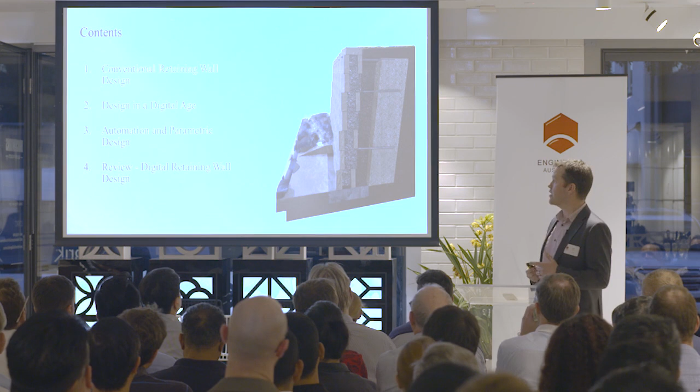So my presentation tonight's got 4 topics. The first part is conventional retaining wall design, the simple things we have to do no matter what we're doing for retaining wall design. Then having a look at the state of play in terms of a digital age and how that influences our design. And then moving into some of the things which are developing in the industry, so automation, parametric design. And at the end, a bit of a review, so a bit of a summary of my perceptions of digital design of retaining walls and what are the key things to take away.

So, conventional retaining wall design. These are things that we have to complete to make a successful retaining wall design, no matter what we're doing, no matter what software, no matter how complex we're getting, whether it's just a hand calculation. So we have to understand the design layout and objectives. What are our profiles like? Are we designing it for a road? Are we trying to control ground movements? Is it a strength case? So what are we trying to achieve with our retaining wall design?

The next is the geotechnical model. So geological model, understanding groundwater, understanding how the ground's likely to behave, and then also geohazards, which may challenge or be issues for our retaining wall design.

Thinking about the design scenarios, what are our loading cases? Is it static or seismic loading? What are our durability requirements? What's our design life? What are the things that are going to drive our design? What codes do we have to adhere to?

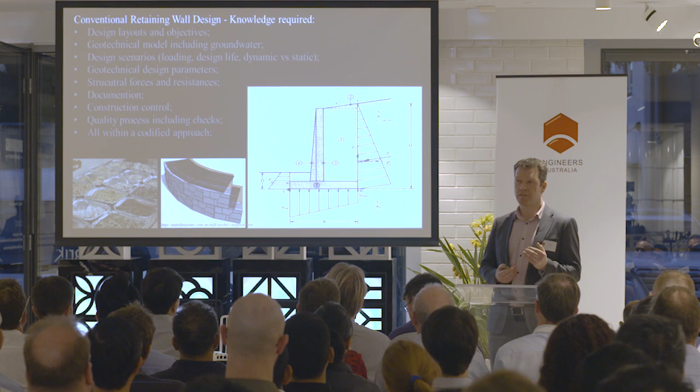And then it's the geotechnical design parameters. So what are the actual values that we're going to use to calculate our forces and our resistances for our walls?

Our retaining wall design then generally generates structural forces. Therefore we need structural resistances, so looking at the concrete, reinforcing, steel strengths, and we then have to bring that together in terms of documentation, drawings, specifications, schedules of quantities.

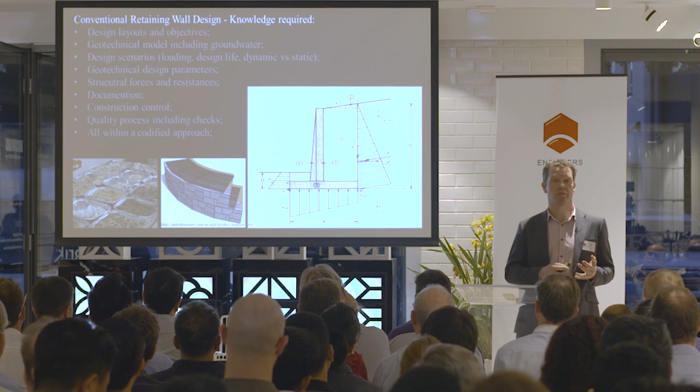The wall then will be built on site, and there needs to be a suitable level of construction control, making sure the conditions on site actually match what we've modelled, what we're anticipating, and that it's been built to the proper standards. And this needs to sit within an envelope of quality control, checking our systems, whether they're hand calculations or advanced computer programs.

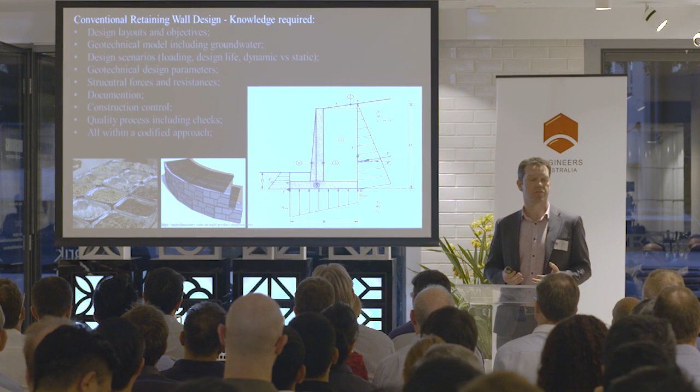And the QA of our documentation all needs to have an overlay of quality, and this all then needs to sit in an envelope of a codified approach, so in accordance with standards and guidelines. So no matter what we do, no matter how fancy we get, we have to achieve all these things with our retaining wall design.

So the second part, retaining wall design in a digital age. The first part is the good old rubbish in, rubbish out. Again, no matter how complex we get with these systems, if we don't get our fundamentals right, those things I've talked about on that previous slide, then we're not going to get the right answers of our retaining wall design.

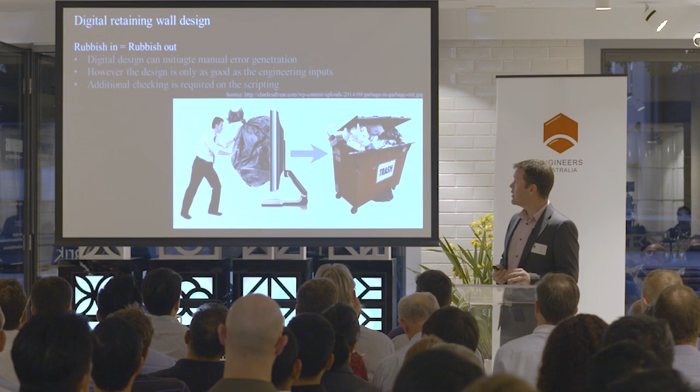And as we get more and more complex with our design approaches, there's a higher risk that we will miss the key parameters or the key inputs. So the other part of it is whenever we're doing additional scripting or programming as part of it, there's also additional design checks we have to have on those pieces of automation or scripting which we're incorporating into our designs.

So digital design inputs. What's currently coming into our design? The recent AGS journal's got a fantastic episode on digital design and inputs of laser scanning, LiDARs, drone surveys. And these are all new inputs which have significantly changed how we design retaining walls.

So at the top there's some laser scanning. That was a research project from a girl at RMIT University. So the universities are incorporating this type of thing as part of their projects. So it's coming up through the graduates.

Site-based tablets for data collection or hazard mapping. We then go into photogrammetry processes, so you can create 3D maps or 3D images with your smartphone. If you take a series of photos, you can then paste them together to get 3D models.

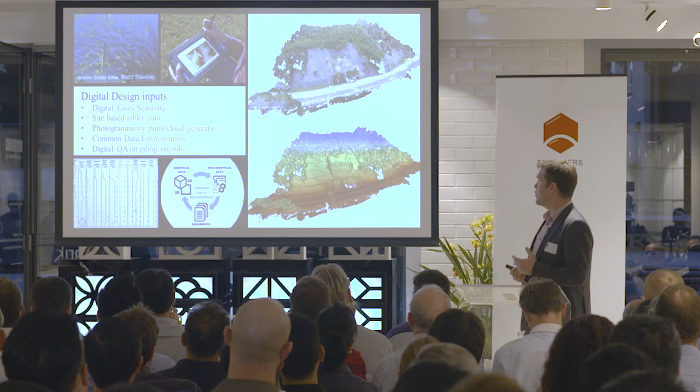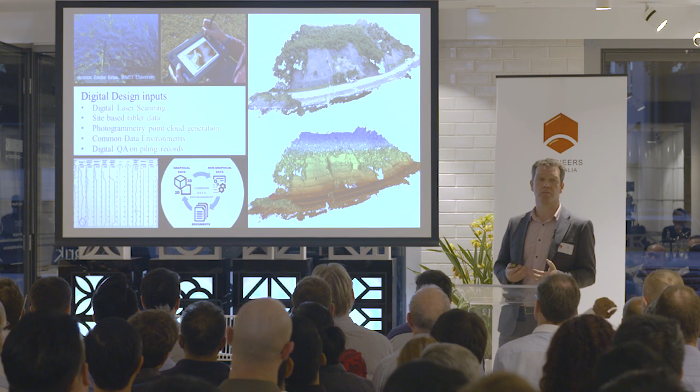We then work in much more complex data environments, so common data environments - graphical data, non-graphical data, our site investigations, and then all documentation that goes with it. So there's a whole new layer of information which we have to process and bring into our designs.

And then there's also a construction control aspect as well. So for instance, that's a log sheet in the bottom corner there from a deep soil mixing rig, which is telling you about the grout processes and the torque speeds. So this information is then available, which we can then start to include into our digital assessment of construction control and quality of construction control.

And then there's our design approaches. So there's various levels of sophistication. I should have actually had a paper and pencil up here because that's also an equally valid design approach we could use. So these things range from a piece of paper and pencil.

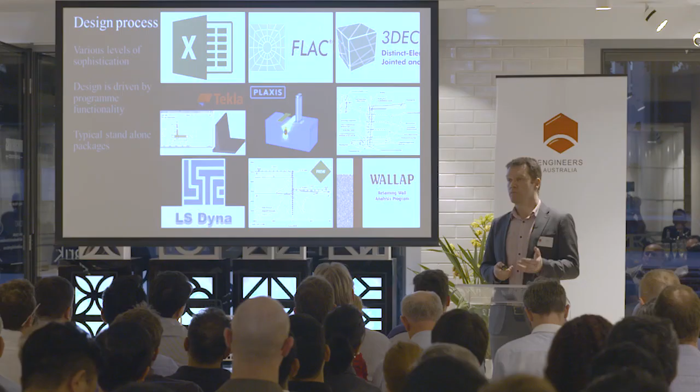On the middle right there, there's a typical retaining wall detail. So there's tables, and Austral's got examples of these, where for a given retained height and given soil conditions, it tells you how many blocks you need or how far your straps need to come back. You then start to move into spreadsheets, which have got added complexities or calculations, but also you've got the risk of someone else making changes to your spreadsheet and not detecting them.

We then move through software packages. So Plaxis in the middle there is a very common piece of software. FLAC, 3DEC, which is an absolute monster of a program that you really need to be very specialist to be able to use. And so there's a whole range. And as we choose which design method we're going to be using, we're also confined to that design method. We also take on all the assumptions that are inherent in those programs, be they good or bad, and the complexities in them.

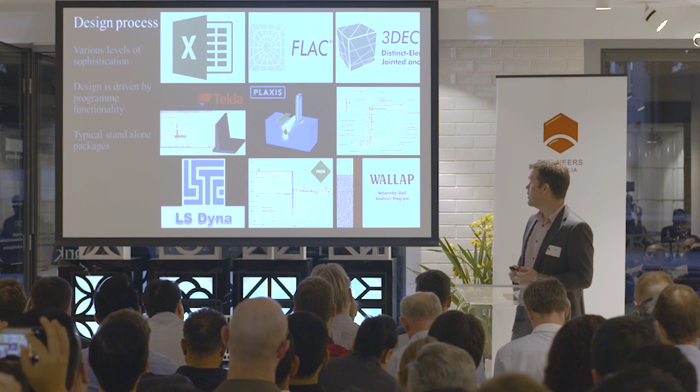These often are also standalone packages. So, right, we need to design a wall, someone goes and does the wall design, and they then produce some output from that. It's not necessarily integrated into the whole design process, so they tend to be slightly standalone.

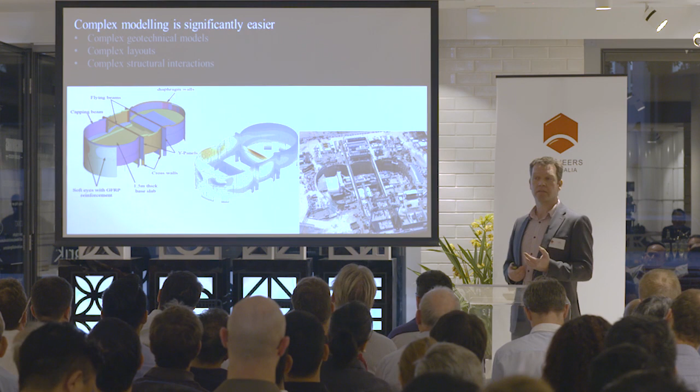Nowadays we can do a lot more complex modelling than we could 5 or 10 years ago - complex geotechnical models in terms of soil hardening models, creeping models. We can model much more complex layouts, and we can look at the forces we're getting through in a lot more detail and identify what our pinch points are. This modelling is becoming more and more commonplace, whereas 5 or 10 years ago it was really quite unique. So our modelling ability has significantly increased.

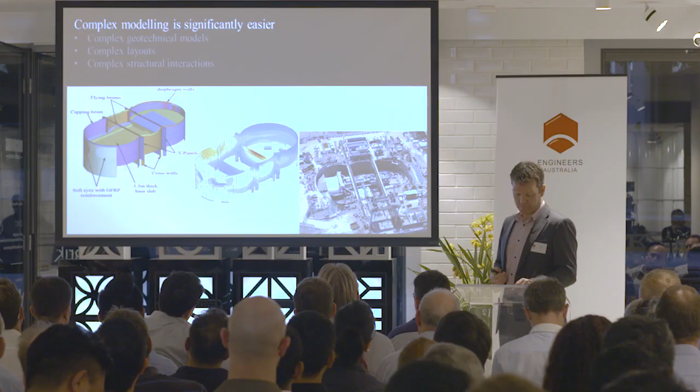So a bit of a case study then, looking at more complex design methods. This case study is debris flows and retention. Typically, if you're looking at a debris flow, it might be impacting on an urban area, and therefore you may put in some type of retaining solution to mitigate those risks.

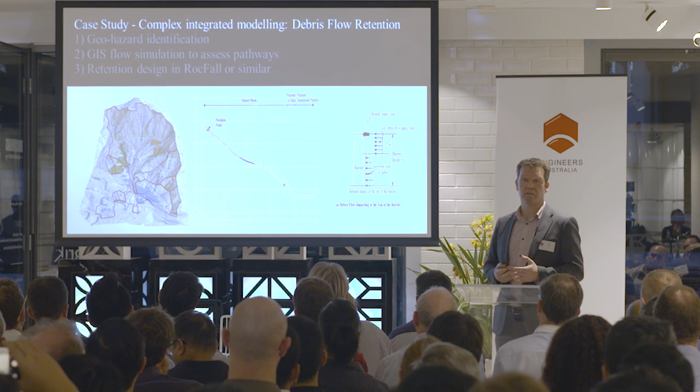So a typical approach might be you identify the hazard from a site walkover, and you have to do that to work out what your risks are. You then might do a GIS flow simulation, modelling that flow path moving downhill, and then some type of retention design, a RocFall analysis, or some type of pressure assessment on the side of a wall. There's a few different ways you can do this.

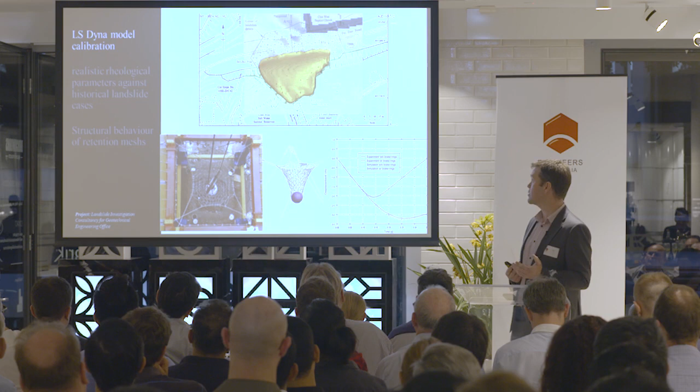But technology is moving to a degree now that we can incorporate more complex dynamic models. In this case, what they've done is taken historic landslides and modelled the actual debris flows to try and get accurate parameters for the soil mass as it fails down. They've then taken structural models - this is in the same piece of software, LS Dyna.

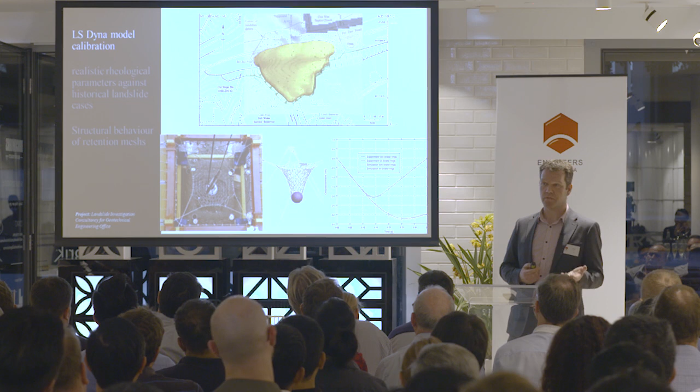They've taken some structural models, actually replicated meshes with controlled tests, and calibrated the results from tests with the actual models to make sure they're modelling the structural behaviour correctly. You then start to combine the two of these together, so you can combine the debris flow with the actual behaviour of the mesh, and of course they then calibrate that against test examples.

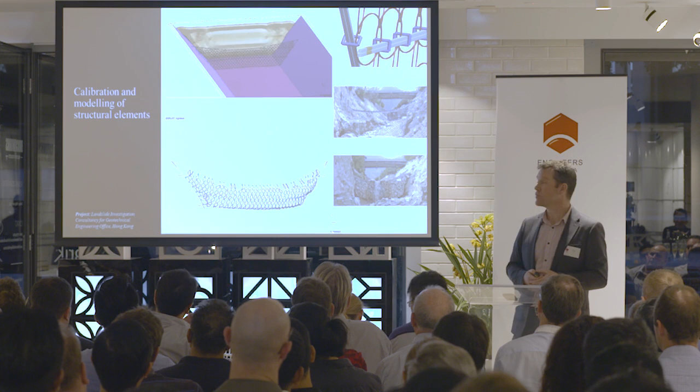And you can then start to model this in real life. So you're now looking at 3D models which you've captured from LiDAR or other methods. You can then model your complex debris soil models, and then look at the forces on the retaining walls and structures. So you're not just relying on some empirical relationship on the impact loading, you're actually doing a proper assessment on what the forces are. And this doesn't have to be landslides.

This could be vehicle impact loading. This could be a ship berthing loading. So there's a whole range of significantly more complex tools which are available now in terms of modelling more dynamic behaviours.

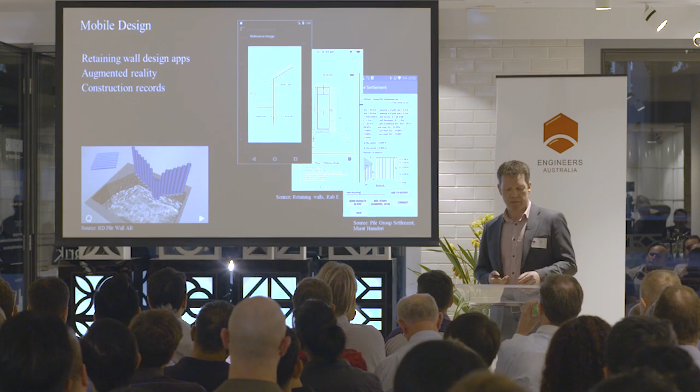We're also in a much more mobile status these days. Each of you in your pocket has got a little mini computer in your phone, and you can get apps which can design your retaining wall. So you're on site and you need to change a pile spacing because the ground conditions aren't right - you can just go through and run it on your phone, that might be a reinforcing calculation. So there's a lot more computing power available to us on site, and data collection is another example.

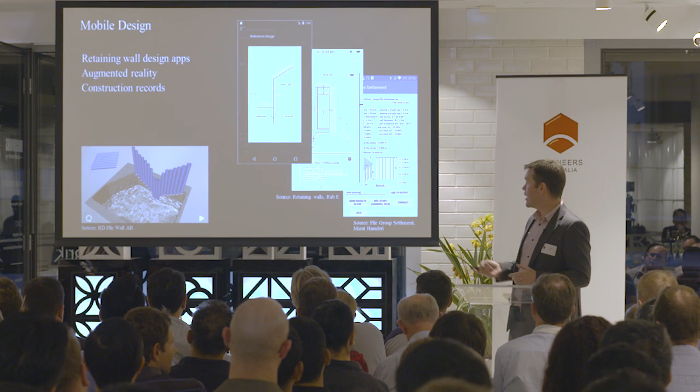You're then moving into situations of augmented reality, like on the bottom left there. So you may have a retaining wall design, in this case a pile design, and you can actually be out on site holding up your phone or your tablet, and you can actually see how it looks. I know they're talking to Michael here tonight - Austral's looking at that type of technology as well. So it's emerging more and more in the industry as this augmented reality type of assessment and understanding for retaining walls throughout the industry.

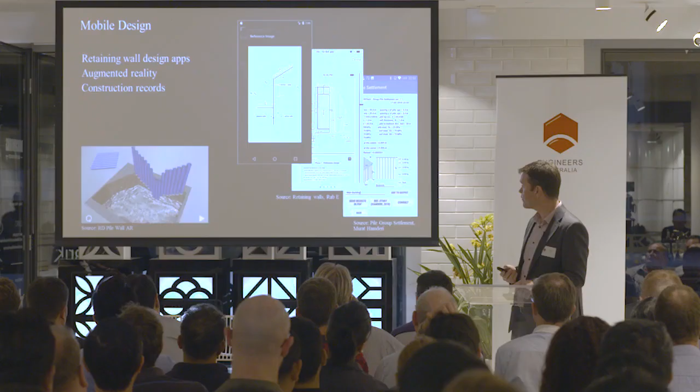Could I just get that video going? So this is a piece of programming work done by DeepMind, which is a branch of Google. And if we get this playing.

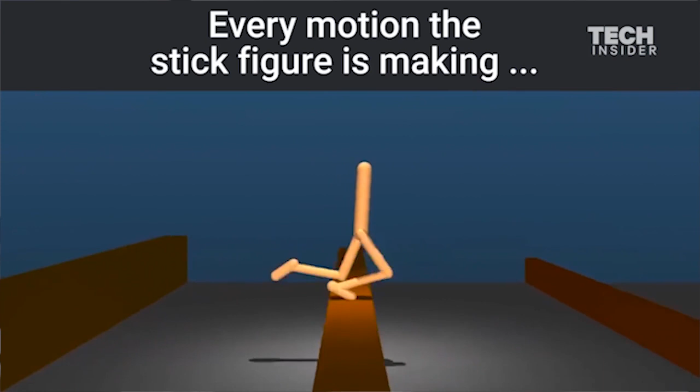So in summary, this is a piece of programming where they compiled a bit of script to enable an object to move, and gave it some ability to visualize and see objects. They then basically told it to move from A to B. That was it. The program had some constraints on relationships, and it started to implement those relationships, slowly starting to move itself forward.

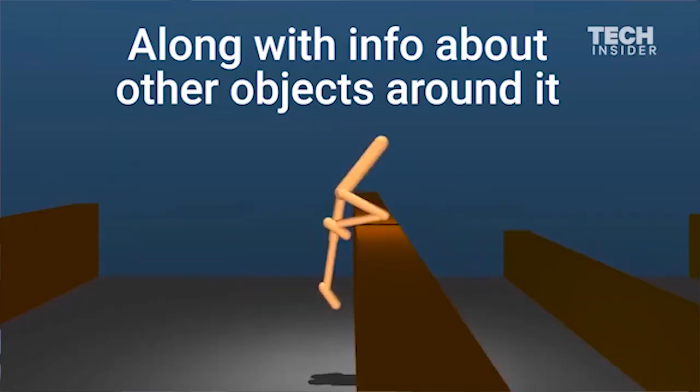It found new and better ways of moving. It could then start to detect its environment and understand how it should be approaching different scenarios, and it turns out that that's the most effective way to run.

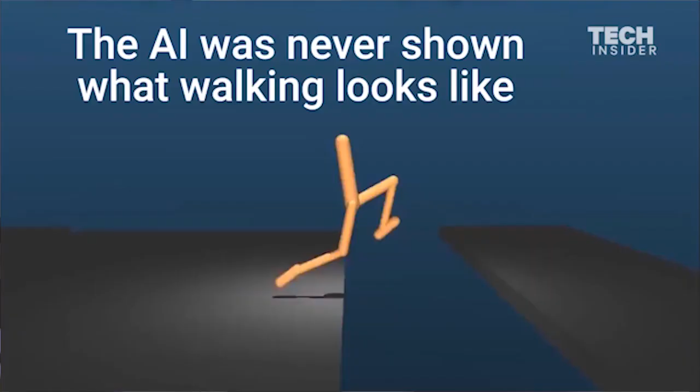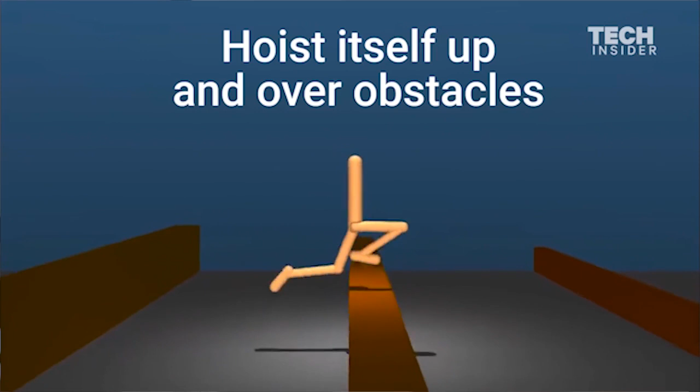So if we can incorporate pieces of script on behaviours and procedures, the machines can then take that to a level which we can't, which we could never model ourselves. So machine learning is the ability of a machine to take pieces of information and continuously improve that, making it more and more efficient to do it better than we ever could.

Yeah, exactly. I love this, it's funny. But what does this mean for us?

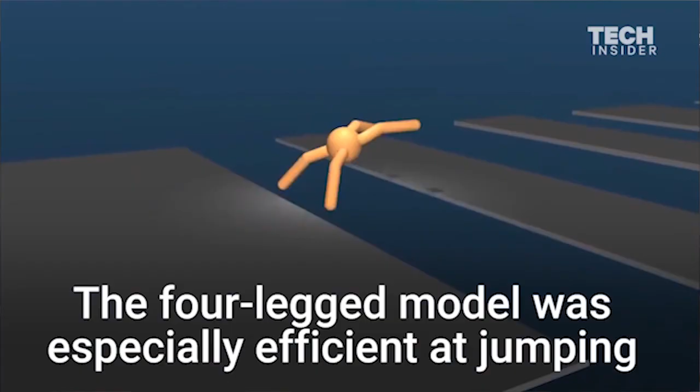So I had an example before where I showed a soil mixing log from a deep soil mixing machine. For machine learning, it could take the individual pieces of that data sheet and interpret what the behaviours are and develop relationships. It might take a whole range of CPT logs and from the tip resistance, the friction resistance and the pore water pressure, determine what the geology is.

It might then relate what one borehole is saying to another borehole. So it might then take those individual CPT logs and assess what a ground profile is.

You might then give it some information on what a valley formation looks like or what a hydrological formation looks like. It would then take those individual pieces of CPT logs and overlay potential hydrological features to actually create valleys - so not just interpolating between points, but using other algorithms to create more complex profiles.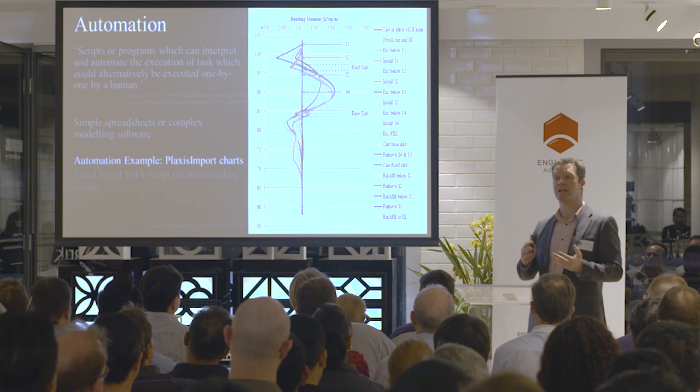So machine learning, it's a big topic, it's a big area, and I just think of a funny running man. That's my base case whenever I think about machine learning. It's self-programming.

But automation - there's quite a few definitions of automation. The one I like is: scripts or programs which can interpret and automate the execution of tasks which could alternatively be executed by a human. This can be applied to simple spreadsheets or very complex modelling software.

So you might have a spreadsheet and a macro which copies a cell from one place to another - that's a very simple form of automation, or something which looks up cells when you paste it in. There's lots of options and ways in which you can include this in your work.

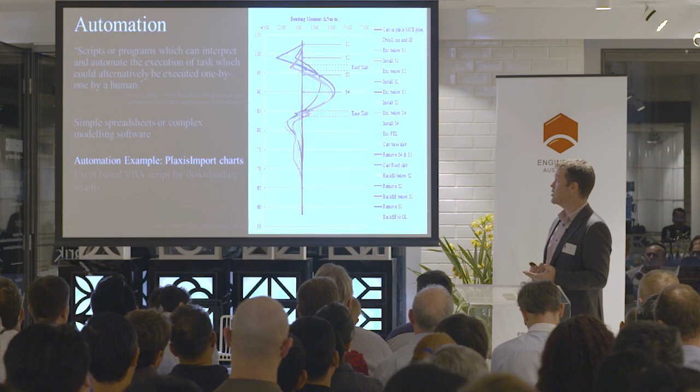This example was built by a colleague of mine, Andrew Coy, and it's an Excel-based script that gets results from Plaxis. If you've ever worked with Plaxis a lot, you'll know that actually downloading every single modelling stage and cutting and pasting it into a spreadsheet is an absolute nightmare - it's a huge amount of work and very time-consuming.

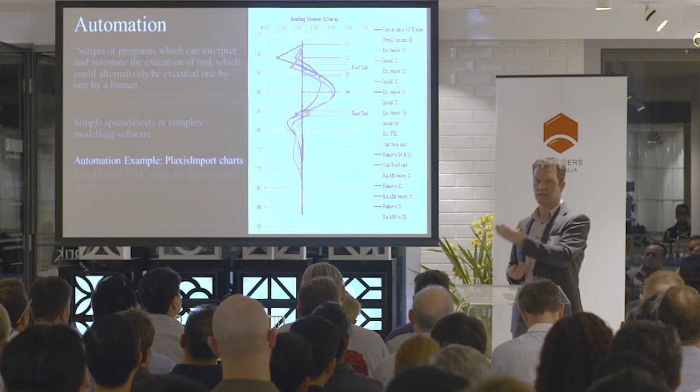So he's written a script which automatically downloads it from Plaxis into a spreadsheet, into a nice, consistent format. The benefit to this is it reduces manual tasks - scripting can reduce the time you're spending on your design, on your more tedious works, and it gets you a more engaged team.

People don't like sitting there all day cutting and pasting data. It reduces your errors - you've got a consistent manner of importing the data, and you've also got improved documentation. If you set up your templates well, then you can reuse them again and again.

Improved productivity and faster delivery, and that's a win for everyone - it's a win for designers, a win for contractors, a win for clients. The faster and better we can do these things, everyone's going to be a winner.

Parametric design - again, parametric design's got a few different definitions. The one I've gone for is where model attributes are interlinked automatically, so when one attribute is changed, the other parameters are adjusted automatically. You change one thing and another thing changes.

This is more and more common in the industry in terms of bridge structures, where they'll change piles, abutment spacings and the size of the decks. But it's also used in, or can be used in, retaining wall designs.

It's been around a long time - Antonio Gaudi, from Barcelona fame, used it as well. To construct his complex models, or his complex buildings, he'd actually hang them upside down, get bits of string and attach lead weights to them. The natural shape of which those pieces of string fell was actually the direction of the forces.

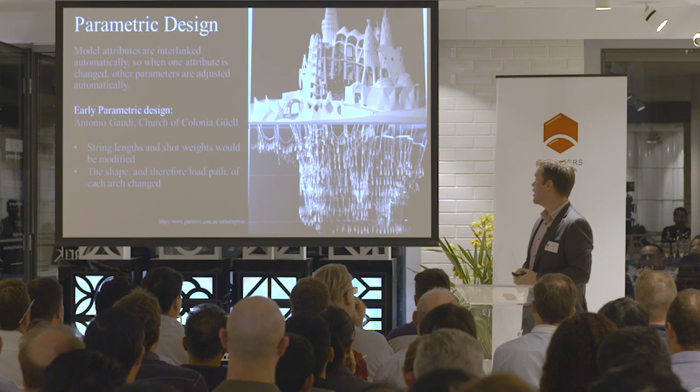What he'd do is change the length of a piece of string, or change the weight of one of the shots, and that would change not just one string, but would then reflect through the model and change the profile and shape of other strings. So he was changing one parameter and it was filtering through the model, changing other parameters. And of course, he'd take the whole thing, flip it upside down, and that's how he came up with his fantastic architecture.

In terms of parametric design, this is an example from the Western Program Alliance in Melbourne. This is Excel-driven visualizations, used in a concept planning stage for bridge abutments for a grade separation.

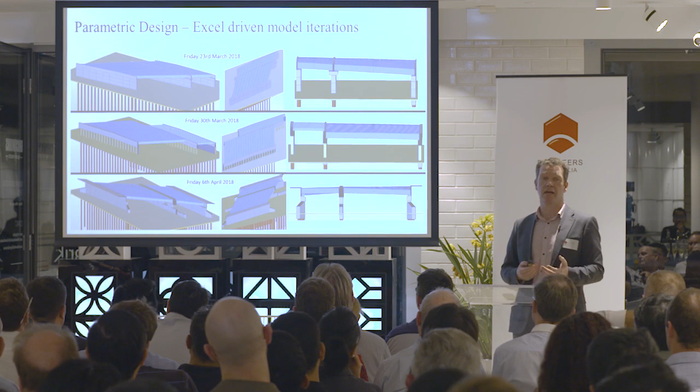These images are taken a week apart. You can see differences in the deck layouts and the type of wall heights, and this is all driven by Excel. So you could be giving someone Excel information or data, they incorporate that into the model, and straight away you've got a visualization which is interrelating it. It's a very powerful type of tool for sensitivities in your modelling.

But it's been around for a while. This case study is the Nunawading grade separation, worked on with John Holland, and this was 10 years ago. Again, this was Excel-based information brought into drawing production, enabling flexible design. The grade separation was 720 metres long with 16 different pile types.

But as they did the job, they were still drilling boreholes. We didn't know what the ground conditions were doing. So we could have standard designs, understand what the borehole condition was, and say, right, you want a type B retaining wall, or we want to change the horizontal spacing of the walls. We'd change the horizontal spacing in one area, and that would automatically change the pile depth or the shotcrete thickness, occurring within the model from Excel-driven information.

This meant we could have relatively accurate designs in terms of our typical sections, but it could then be easily incorporated into our models, and our drawings then became relatively automated. We'd change a pile spacing, the pile length might automatically change within the model. We'd then push print, and out it would come with the changed pile length.

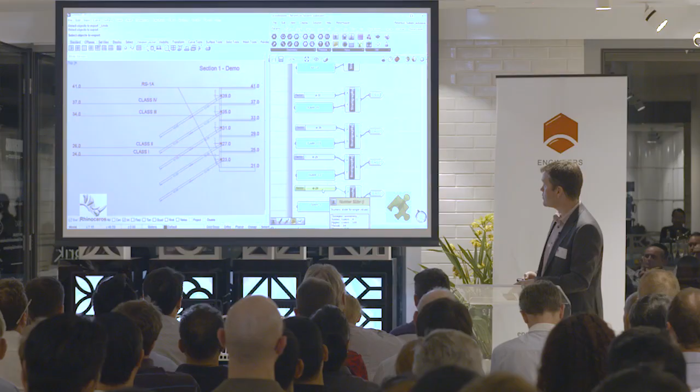Another example of parametric design - this was some work done by Rebecca in the Arup office in Sydney. This uses two programs, Rhinoceros and Grasshopper. Rhinoceros is the visualization on the left, and Grasshopper enables you to change parameters, and you can do this with Revit and Dynamo if you're from a more structural background.

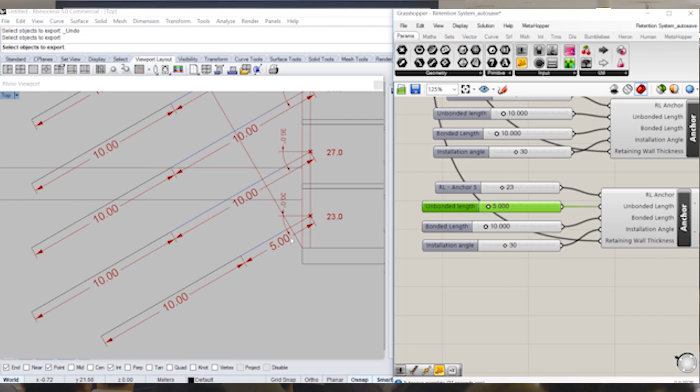What we can do here is change simple parameters on the anchors, for instance the unbonded length, and that will automatically change in the visualization. You can easily control parameters for your documentation, and you can just push print on that page, and you then have a real life change in your retaining wall design.

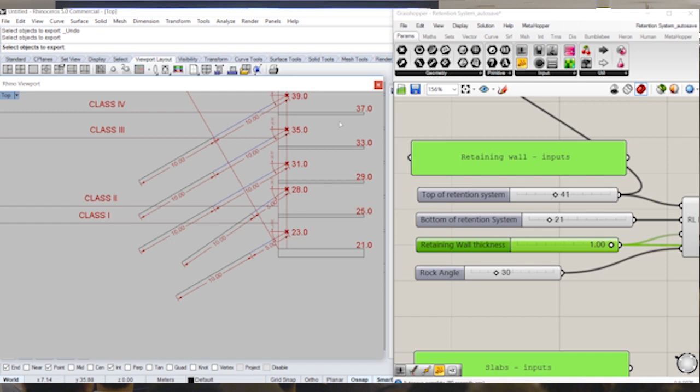This gives a lot of variability in terms of doing sensitivities to designs, and a bit more complex, putting curves into it. So we can simply change a profile, but we can also connect it to an internet or website where we can start to share it - in this case, through a website called Flux.

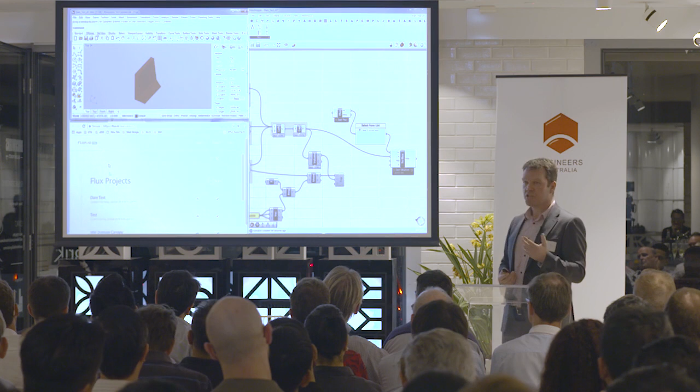This video is slightly historic - Flux no longer exists, but there are other websites such as Speckle which you can use for hosting. You can share a portal with another person in your company, another office, another company, or somewhere else around the world. They can log on to the system and see the model. You can be changing the model, and they will see it automatically change as well. This presents a whole new level of information sharing compared to typical retaining wall designs.

Once you've shared that information, it's then possible to export it into other programs. So in this case, we're going from Grasshopper into Tekla, which enables a bit more structural modelling, so you can assign concrete parameters to it. You can take the shared piece of information and incorporate it into other software. So it's potentially a whole different workflow.

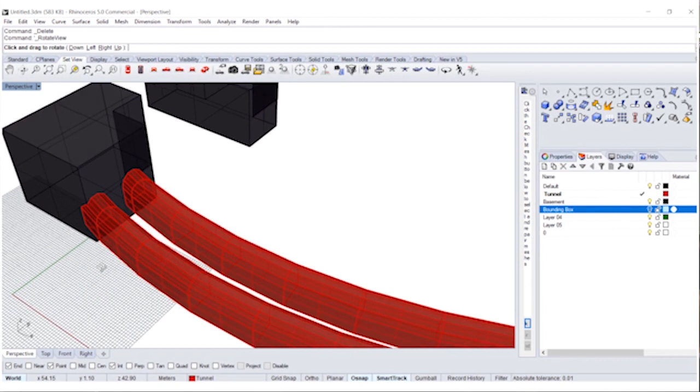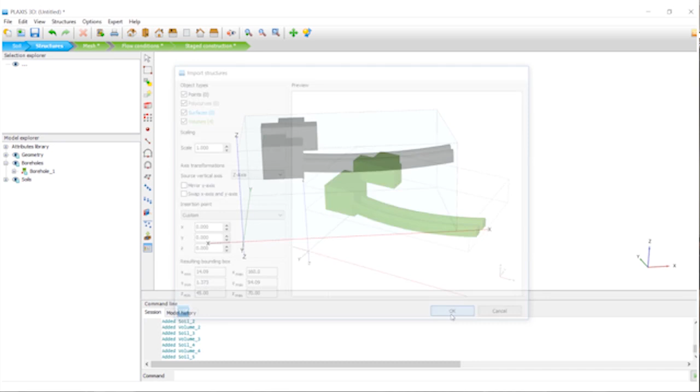Another case study doing a similar thing is creating, or in this case modelling, some tunnels, again using Grasshopper and Rhino, so this could be modified parametrically. Creating the forms, saving them off, and then we export them into Plaxis 3D. So those shapes can be incorporated in, you can mesh that up, and start to model it. You can parametrically change things, and bring them into more and more complex shapes.

And of course, that model could have been shared across offices. One of the key things with this is you then need to make sure you're getting your mesh and your techniques right for actually modelling it. And this is where you're partially constrained by your software, but I'll talk about that again in a bit. So there's whole new options there in terms of workflows in the digital age.

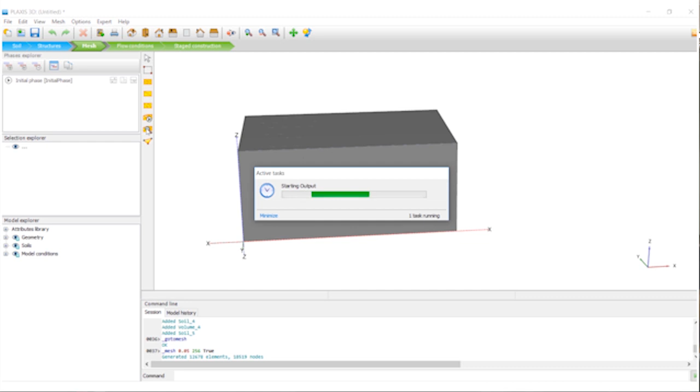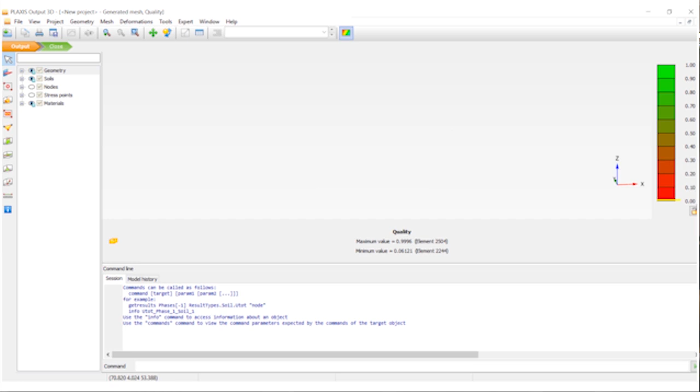So the final part of my presentation is basically a review on where we're at. And I wouldn't be a geotechnical engineer if I didn't have a quote from Karl Terzaghi in my presentation. I found this one - it's actually on lab testing, but I found it equally, or perfectly, applicable to digital design. So results depend not on the perfection of the equipment, but on the truth of the proposition.

So it's about getting, no matter what we're doing, our fundamentals right. What's the purpose of our design? Why are we designing it? And making sure that our inputs are correct.

The simpler and cheaper the apparatus, the better it expresses the purpose. And accordingly, one can gain insight into a process being investigated, approving or rejecting, and postulating anew without wasting time and money. So if you're using a simple piece of software or a simple design process, it's much easier to understand changes and be clear about what those changes are.

If you're using something like that Plaxis 3D model and I try to change something, I might suddenly start to get meshing problems, which is just an inherent thing that can happen in 3D Plaxis models. So then I'm having to change my mesh. And so the complexity of the model is driving me down different paths, and I can't actually see the simplicity of it. Or I might be changing some geotechnical parameters, but because of the complex behaviours, it's not quite so clear what's going on.

So costly sensitive instruments belong to a situation where one already has a clear hold of the natural phenomenon and where there is value in obtaining refined numbers. So just because you can do these fantastic complex models doesn't necessarily mean you're going to get value out of it. Simpler design methodologies may be just as effective.

When one begins experiments with costly apparatus, he or she becomes a slave to the apparatus and the experiment. Rather than serving to establish the truthfulness of a valuable idea, it serves merely to establish a fact, but never to establish a law. So every process we take on, every more complex piece of software, has its own assumptions built into it. So whatever we use, we're taking those on, and the more complex it gets, the more complex our assumptions become.

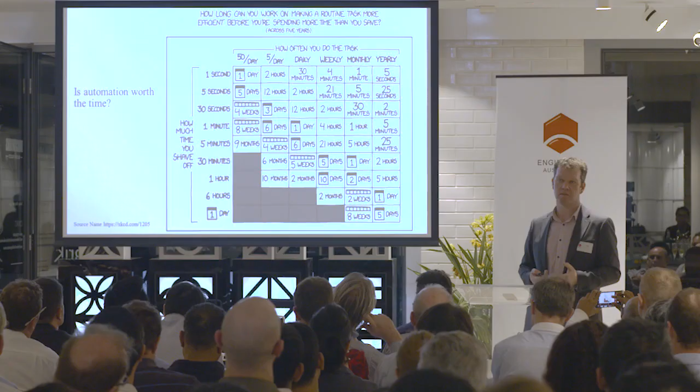This is something that's struck me in the industry recently. I noticed that in April 2018, Bentley purchased Plaxis and Soil Vision. Bentley already has a very strong suite of software - GINT for receiving geotechnical data, Open Roads for modelling geometries, MicroStation for drawing and documentation, all sitting within a ProjectWise environment, plus lots of other software packages.

Soil Vision is a Canadian-based company very good at modelling subsurface profiles and creating hydrological models. Combined with Plaxis, you start to get a start-to-finish geotechnical design flow. You can be out on site, record data in GINT, create relatively complex models using Soil Vision, consider your geometries and drivers for your retaining wall, and incorporate those into Plaxis models - maybe 2D sections or 3D models. You then have those in an environment more compatible with drawing and documentation, all sitting within a common data format of ProjectWise, where you can control versioning and automatically update models.

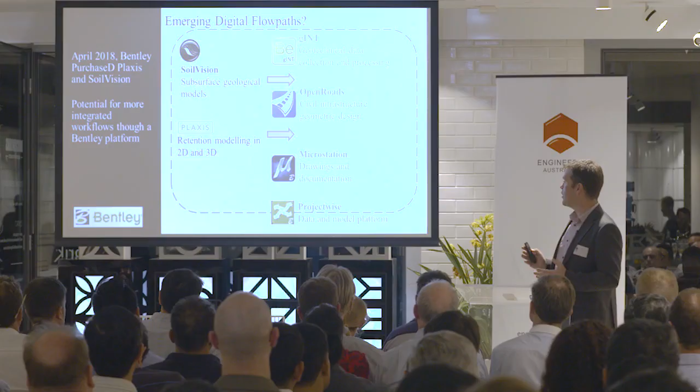I thought that was a very interesting change. I had a chat with Erwin Beernink from Plaxis, and they're working on trying to get this workflow integrated. It's going to take a lot of work and effort to get that compatibility, but my perception is that more and more, this is where the industry is going - trying to have integrated solutions and utilising the efficiencies that brings.

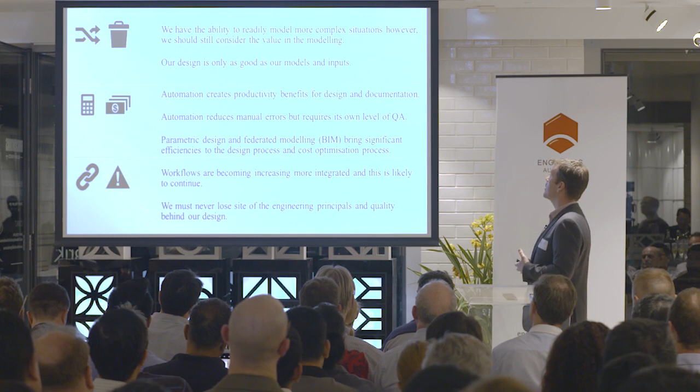So in summary, we have the ability to readily model more complex situations. However, we should consider the value in doing so - are we really getting good value with these complex 3D models, or can we use simpler approaches? Our design is only as good as our models and inputs. If we've underestimated our geological model, got it wrong, or our geotechnical parameters are wrong, or we're not designing for the right inputs, then our results similarly won't be right.

Automation can create productivity benefits for design and documentation. It also reduces the potential for manual errors, but you then need to bring in another level of QA control to make sure that your automation and scripts are actually doing what you expect, that they're behaving properly. Parametric design and federated BIM modelling, which Melanie will talk about, can bring significant efficiencies to design process and cost optimisation.

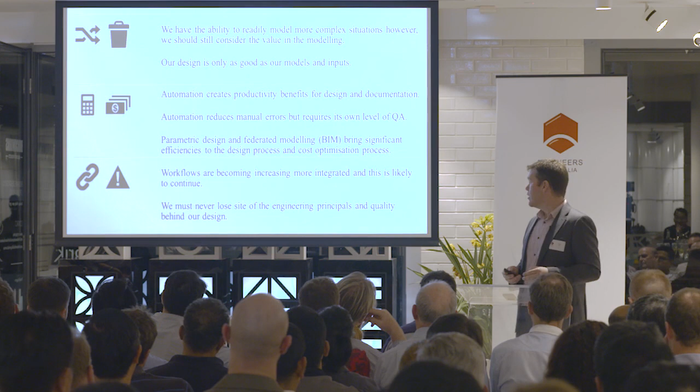Finally, our workflows are becoming increasingly more integrated, and I think this is likely to continue. But we must never lose sight of the engineering principles and quality behind our design - that's the key part. You can't beat a bit of experience looking at things and asking, does this look right? And the practical experience of understanding how these retaining walls work, whether they're simple or complex. Thank you very much.

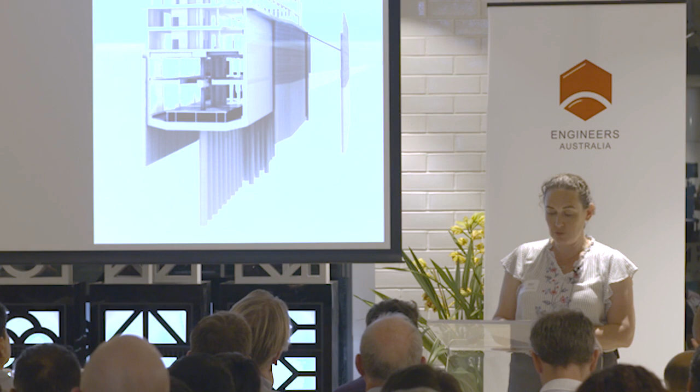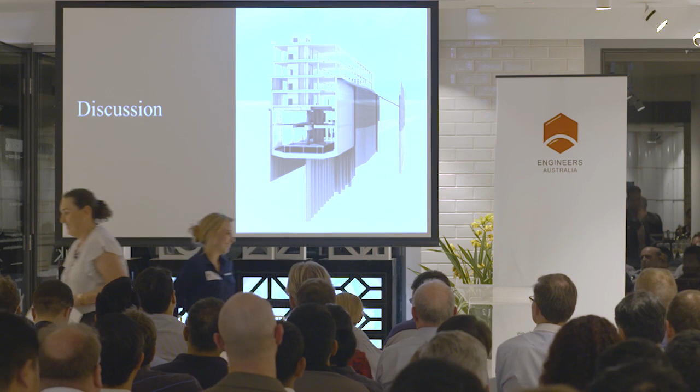As Catherine mentioned, I'm not an engineer, so please don't hold that against me. I started off doing architecture, but very quickly jumped to the dark side, and have been in construction for the last 5 years, where I feel much more at home, and I do all the geeky things. I'm really glad Chris is so knowledgeable about retaining walls and how to design them, because I don't know much. I've learnt a lot in the last week about it, but hopefully I can give you some insight into what happens with the technology and the data available on the big projects where BIM's mandated or available, and some of the benefits you can see down the line.

So I'm going to give you a quick overview of what I think BIM is, and then touch on a few of the projects in Perth that Multiplex have worked on, and the ones that have had BIM involved. I'll talk about the current technology from where I sit, and some of the potential benefits I can see in the next 5 years or so coming from these technologies and the information available to us.

For me, BIM, while some people think of it as a 3D model, I see it more as a series of geometry with data associated with it, and the data is actually the important bit. You'll have Excel schedules you can pull out of it, CSV data that allows you to transfer information between models and software. You've now got cloud spreadsheets that we're starting to link the data in these models to, and my favourite, the API connections between software in the background.

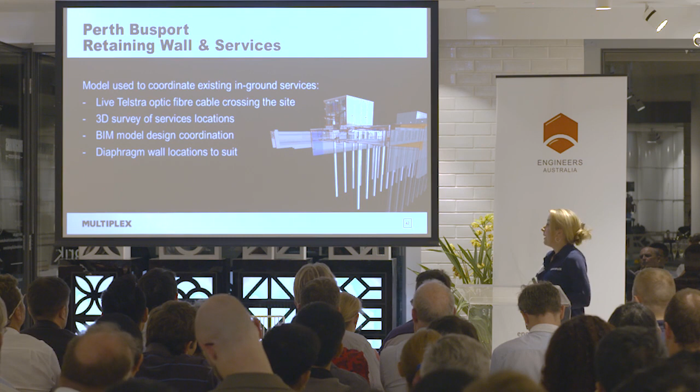And they were building diaphragm walls straight past this. So being able to not only design the wall locations through the consultancy period, but also hand that over to the subcontractor and make sure the survey points were bang on, was much easier when they could actually coordinate it using the model. So that was one of their highlights, I guess.

Moving on to the stadium, which was 3.5 years of my life, and Multiplex's first full-blown BIM project. It was state mandated, which gave us a big stick to make sure quality went in and we could actually use it throughout construction, knowing the design quality and QA was actually in the model. Some quick facts: State Government of WA, 2,500 precast concrete piles, and then 7,800 CMCs in the surrounding area to try and improve the ground. It was built on an old rubbish tip, so you can imagine what that's like, and then it's in a wetland area, so the ground stability just wasn't there.

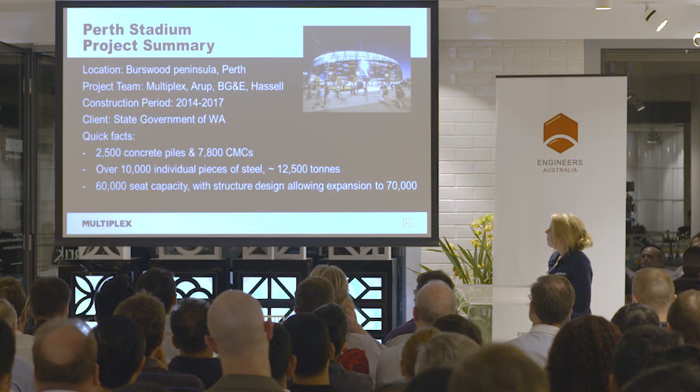The stadium itself will be a 60,000 seat capacity, and the structure has been designed with the provision to add an extra 10,000 if Perth keeps growing the way it is. And the steel structure was phenomenal, so I've got a couple of slides later on to show you about that.

On the BIM front, the federated model was made up of all these other individual models built by different companies. In total there were about 105 individual models that went into this federated model, done by 36 companies, 24 of which got handed over to subcontractors. The compressed export file was 2.5 gigabytes. The Revit and Tekla models added up to about 200 gigabytes in their native formats, but every week we'd spit out a 2.5 gigabyte Navisworks file.

The model itself got used by a variety of different people. We had the client, who actually co-engaged PDC, our BIM consultants, to upskill and do training so they could use the model. They were made up of 4 different arms: the sports guys, strategic project, local government, and Venues West, all as one big team.

Then you had the operator of the stadium that came on about 2 years into the project. And the contractors - we didn't use it as much as I would have liked, but we're getting there and upskilling people as we go. Consultants generally have a really good understanding already of Revit and Navisworks and that kind of thing.

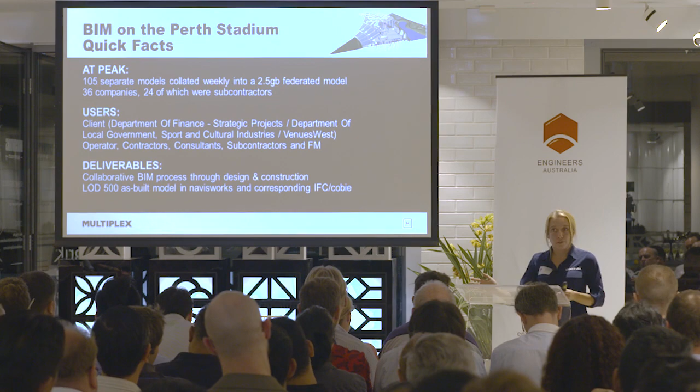The deliverables weren't just the LOD as-built model - we actually had commitments to make sure during the design and construction process we were encouraging BIM collaboration and making sure people were trained and getting the most out of these models.

Some of the software we used was the Autodesk suite - 80% of the consultants used Revit. The main exceptions were structural guys who used Tekla. Dynamo is a great little API that plugs into Revit, and we did some pretty fancy stuff with that. Jira was used for issue tracking, brief compliance, and some of our design changes that came through. Tekla, obviously, was used by the structural guys, who made some phenomenal models. Aconex was our document control and correspondence system, and dRofus was our room data sheet, schedule of accommodation.

So that just gives you a taste of the software that was used and the information carried across all of those, and we tried where possible to get them connected.

One of the big wins was the steel model. The steel subcontractors we got on board had a really impressive tracking system - every single piece of steel had a QR code affixed to it as soon as they started fabrication. That matched the ID in the model, and they would track it through all the different stages, from documentation through to fabrication, painting, quality checking before it left, delivery, erection, and final sign-off. Everything got scanned on the way through.

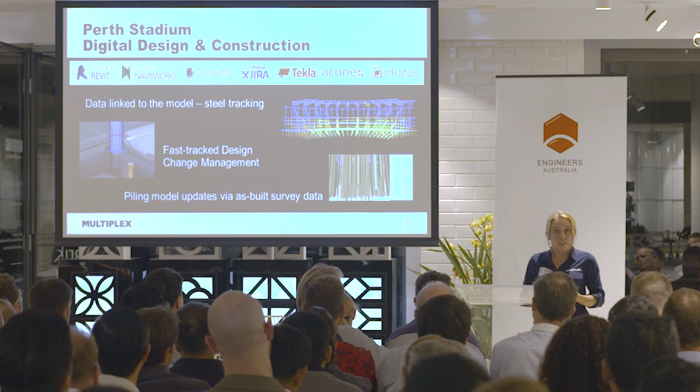So that was a shop drawing example of a cage that was obviously supposed to be at a particular height, and while it was going through the fabrication documentation process, the architect had set the slab down a bit more. Normally on 2D drawings that's really hard to pick up unless you're really good at RL spot checking, but in a model, very easy to see.

So they did all of their shop drawing reviews directly in the model, commented straight on the model. I think there was about 4,000 steel shop drawings that got processed in probably about 3 to 4 months. So it really allowed them to get the steel up and running, which from a contractor's perspective is your critical path. Once your structure's up, you're good to fit out.

And then on the bottom right, right towards the end of the project, the piling was one of the really effective ways where, similar to what Chris was saying about the parametric design, they were able to connect the bulk of the design and the modelling parameters to a spreadsheet. The precast piles, which aren't the ones shown there, were assemblies of 4 or 6 different precast with a cap at the top, and the engineers were able to do their calculations, tweak in an Excel spreadsheet, push it into the model, and all of the 2,500 piles would update to suit their calculations.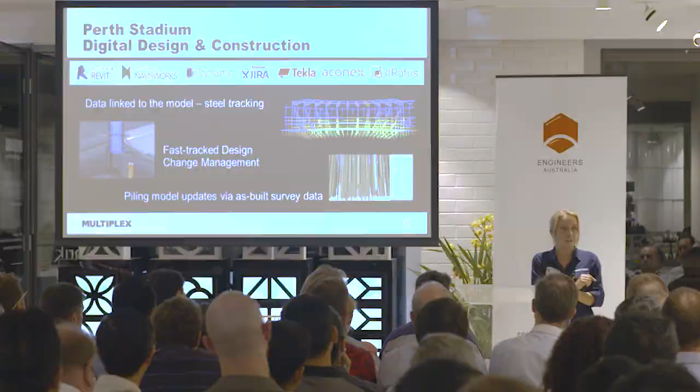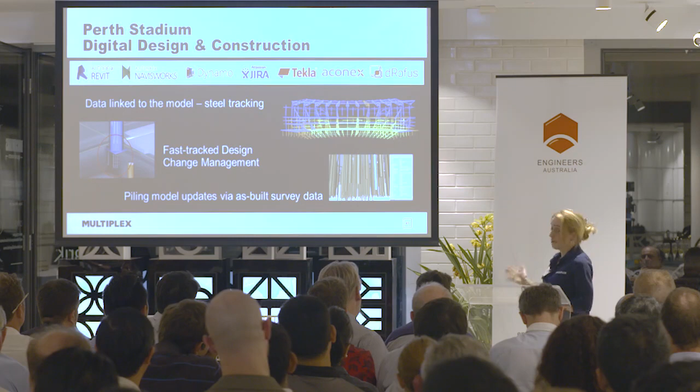So there was no manual placing or anything like that. The second step to that, which helped us, was it was our obligation to hand a model over to the state, which was exactly as built. The guys who were installing the piles did the bottom RL, top RL, all in a spreadsheet, and all they had to do was import that to adjust to suit the final install locations. The efficiencies in that are just phenomenal. Previously, you'd had to click on every single one and amend manually. This was just a couple of pushes of a button, all done, and you know the accuracy's there.

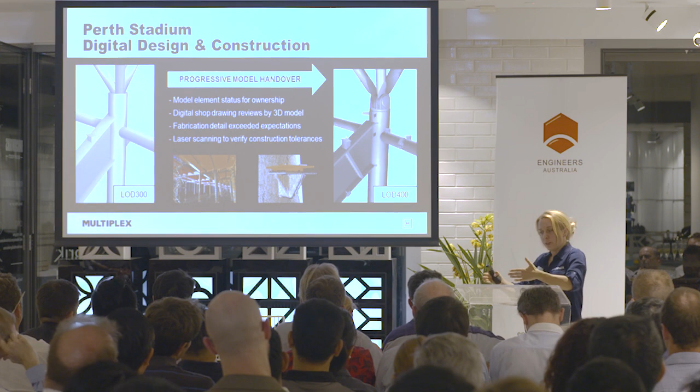One of the other complexities of having such a compressed program was we couldn't wait for the structural engineer to finish designing and modelling their steel before we gave it to the subcontractor. We had to do a progressive handover. So the stadium was being built from one side around, meeting up at the other side, and as soon as we possibly could, we gave a chunk of the model, took it off the structural consultants, handed it over to the subcontractors for them to start fabricating, while the structural engineers were continuing designing the rest of the structure.

That allowed the structural engineers as much time as possible to get the design as close as they could before it went to the subcontractors. The model allowed us to actually attach ownership to every single piece of steel in the model, so people could filter by, okay, that section is owned by the subcontractor, that section is still in design, and it progressively allowed us to chase as we went round. It was a little bit time consuming, but definitely sped up the program and the overall time.

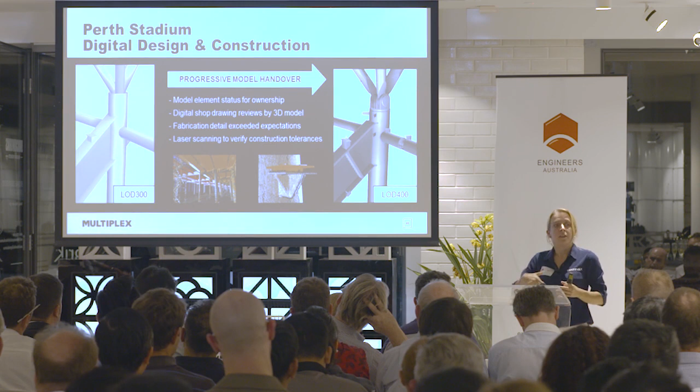Then down the bottom, you can see some of the laser scanning that we had to do. There were 2 parts to it. The first was as the structure was being built around and then connected on the other side, you can imagine the forces and the pull of the stadium before it got connected on the other side. So we had to make sure that the deflections were in design tolerances, and the scan on the left were to check that the columns were within tolerances, and the scanning was up to 3 mil accuracy. We sat it over the top of the design model, and we could measure the difference from the design location to the actual installed locations as it was going up.

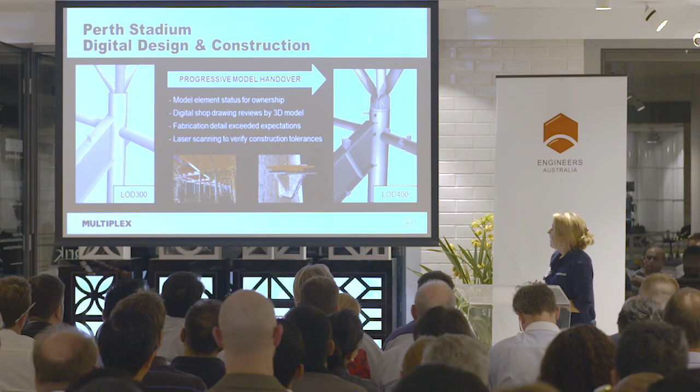And then on the right were the cleats for the facade. Our steel was done by one subcontractor, facade by a completely different subcontractor in China. We had to make sure that the steel was installed close enough so that when the facade panels arrived from China, they could just be bolted straight on. So the differences in these cleat locations got assessed and fixed where possible prior to the install, the panels coming over, and that just streamlined that process rather than arriving, trying to get it on, it doesn't fit, what do we have to fix. Again, that allowed us to speed up the process.

A lot of you may know the pain in trying to highlight revisions and changes on a spreadsheet. From an architect's world, it's the door schedule, the amount of changes that you make, and they generally do it by if they change a cell, they click on it and highlight it yellow, which allows a lot of room for human error, forgetting to highlight things, forgetting to turn the highlight off next revision. So we set up a system where you could have the previous revision in one tab, current revision in the second tab, and Excel automatically highlighted anything that was different between the two. So it saved them a lot of time and gave us a lot more confidence in picking up all the changes.

We actually have that sitting on Google Sheets now so that everyone can see it live all the time.

In this scenario, we had a door and security devices around the door that were modelled by two completely different companies. But as a contractor, you need to have someone install those security devices, and they need to know what door it's going to. Now, the engineers hadn't typed the door number into each of those devices, so we had no way of pulling out a schedule knowing what doors they went to.

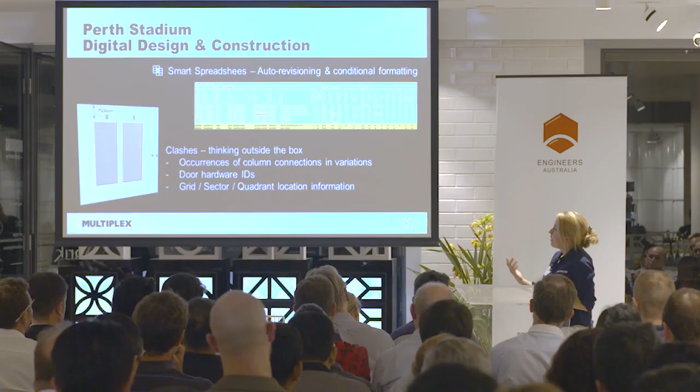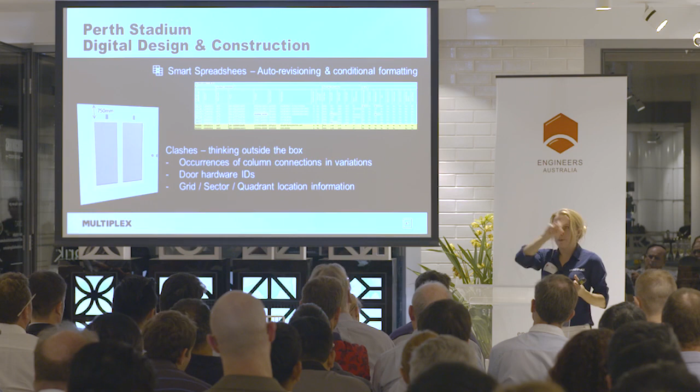So we were able to do the clearance clash between column type A and column type B, find how many there were with grid references for each. Normally a really tedious process looking through drawings, but this was able to be automated and sped up.

Now this one is a little bit abstract with the slides, so apologies about that, but I couldn't think of a better way of describing it. We had 13,000 bits of furniture that we had to tag with individual QR codes so that the state government and facilities management team could monitor it after. So we had a Revit model with everything modelled, and we somehow had to incorporate this.

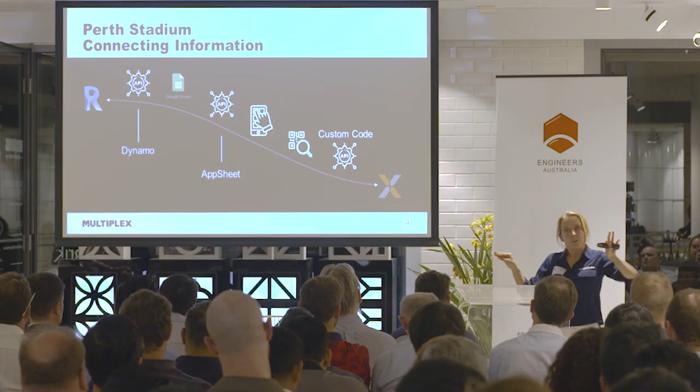We got a few quotes that were stupidly expensive processes and proprietary software, but we figured out a way just by using API, which I'm not sure if many of you know, but it's like a kind of backdoor into software that allows you to use some basic coding to broaden the software tools. In this scenario, it also allows you to connect two bits of software using these backdoors and an API between them to kind of control each bit of software.

So what we were able to do was take all the 13,000 bits of FF&E in the Revit model, using an API, Dynamo in this case, and pull it into a Google Sheet, which is live on the cloud.

And then from there, there's another API called AppSheet, which is a brilliant little tool that from a Google spreadsheet can create an application on a phone.

Now I have no app making experience, figured out how to make a phone app in about 2 weeks using this software. So the guys on site were able to take their phone,

find any bit of furniture in any room, scan a code and say, yes, I've tagged that one or I've installed that one. And we even had a guy in Sydney who's really good at custom coding, and he made his own API that connected Aconex Field.

I don't know if any of you have used it, but it's a defecting tool. You have little QR codes stuck up on each room that gives you a list of defects. But we were able to link that QR code in the room to the equipment list for the room.

So they could scan this Aconex code, which is for a completely different purpose, and get a list of all the furniture that was supposed to be in that room and the status of each of those. So it would tell you if something's missing or give them a list of things that they needed to install in the room.

So all in all, it cost us about $10 a month extra, which I paid on my credit card because I couldn't be bothered dealing with commercial. And that was AppSheet. The rest were free tools that we already had on the project. And we were able to set up a great system that effectively got 13,000 bits of FF&E installed in about 2 months, right at the end of the job.

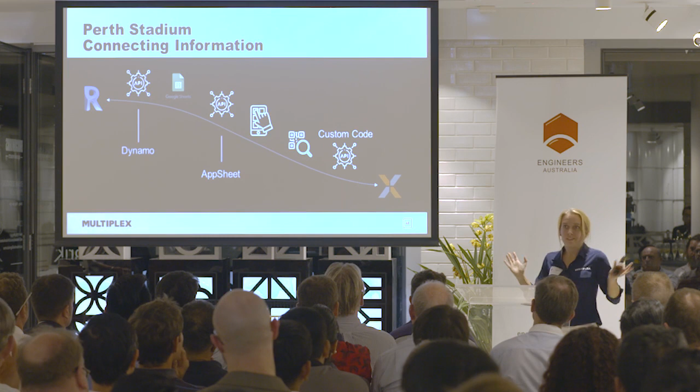So the possibilities are endless, but that's just a little example of how you can connect the data using the software that you've got. And like the quote that Chris had, the simpler you can keep it, the more efficient it is.

So I'm on Karrinyup Shopping Centre now, which fingers crossed will get moving in the next week or two. But it doesn't actually have any BIM deliverables, although a lot of the consultants are modelling in BIM, so we get the access without the obligations to the client, which is a good mix, I think.

It's a project for AMP Capital. There's 12 different stages that we've got to hand over at different times. It's about doubling in size, 5 stories of basement, car parks and shopping centre, and 290 stores on completion. So it's a pretty decent job as far as shopping centres go.

But I had a chat to the guys who are on site, and because we've had a slow start to it, they've had the time to learn the software, figure out the model, and are actually starting to use it possibly even more than I saw in the stadium, which is great.

But a couple of the examples that we've had so far, we've used it to manage all the services that were designed to go straight through the piling, which, as I'm sure you can imagine, wasn't ideal for us. So wherever possible, they got designed out early, and where it wasn't possible, like this high voltage conduit up there,

we are able to really clearly communicate that to the piling subcontractor. This is going through at this exact point, please don't take it out, that kind of thing.

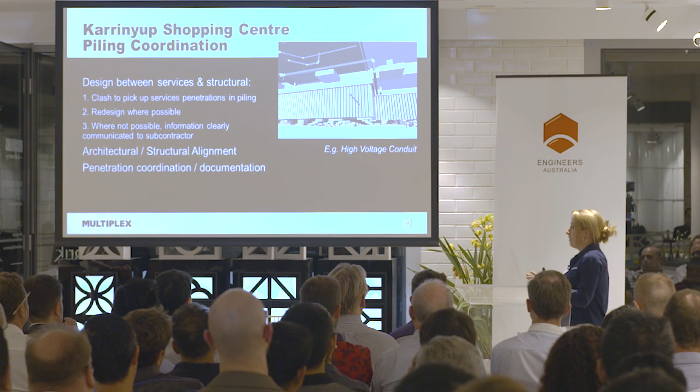And the structural engineers have actually said the penetration, coordination and documentation has been easier because we've been able to say, okay, here's going to be the line in the sand where the structural guys document all the penetrations and do the calculations that they need to. So all of the design consultants work up until that point. We draw the line, they do all their penetrations, and touch wood, there's not many changes after that.

We are milking the cloud collaboration spreadsheets. So it's taken a while to get the job off and running, which means the program's changed numerous times. And we've set it up so that we can actually export an Excel from the program into Google Sheets, and that filters through to a variety of different deliverables tables, scheduling tables, and the dates automatically update anytime we get a new version of the program. So that's sped things up.

From the site team, some of the benefits they mentioned was being able to gain an understanding of the shear walls in the project, because with an existing structure, the proximity and extent of these shear walls was quite difficult to get their heads around with 2D documentation. But being able to fly around the model, switch things on and off, makes it much easier.

We've got a lot of steel structure that's existing and new attaching to that existing, all on different angles. Again, they just switch stuff on and off and they're able to get a really good understanding of how they would install that, the sequencing, all that kind of thing.